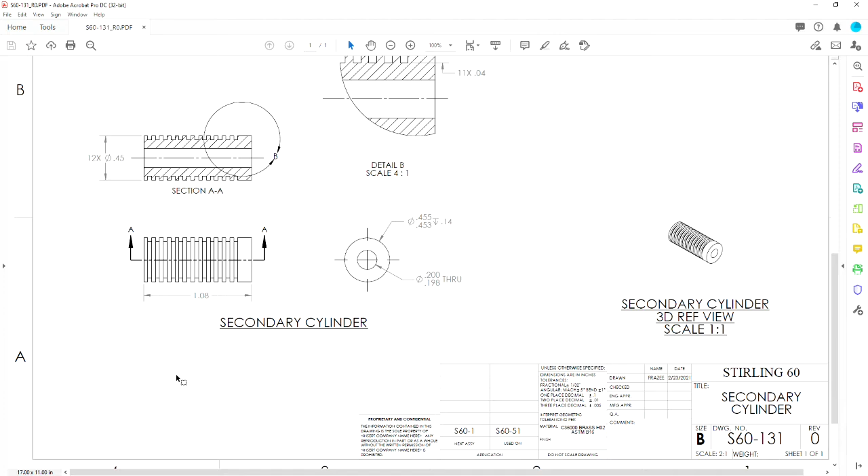All right, so let's look at our drawing, and our front view is what we want to represent in the front view of what we're modeling. We're going to revolve it without the ribs, and we'll include the hole in the center in that revolve. And then we'll come back and make a single groove and use a pattern to duplicate the groove pattern. This is another brass part. So let's go to SolidWorks.

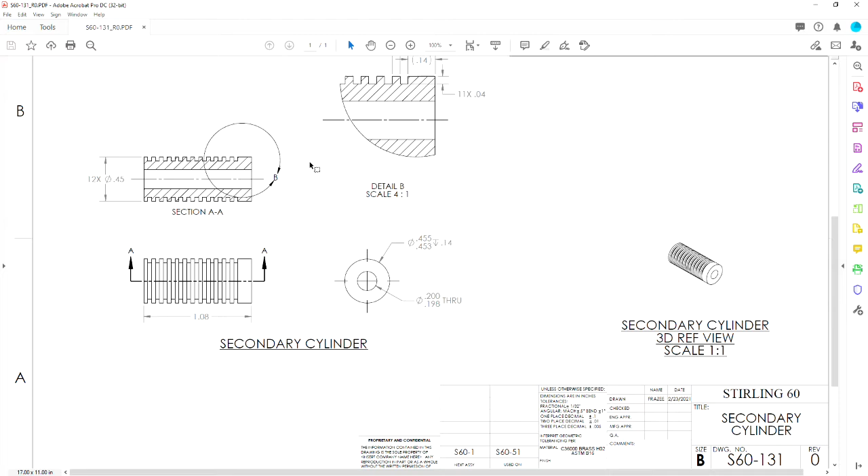And we're going to create a new part. Make sure it's in ANSI and inch. And once that's up, we're going to select part. We're going to hit OK. Alright, so we're going to make our planes visible as we have on several others. And we want the side of the cylinder to be shown in the front plane. And if we look at our drawing, all the dimensions more or less come off this right-hand side. So we're going to put that up against the right side viewing plane. So we'll go sketch. And we're going to sketch on the front plane.

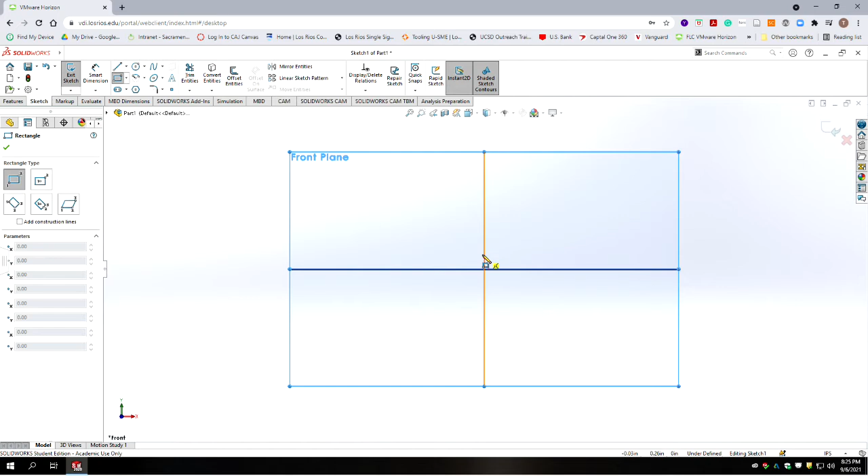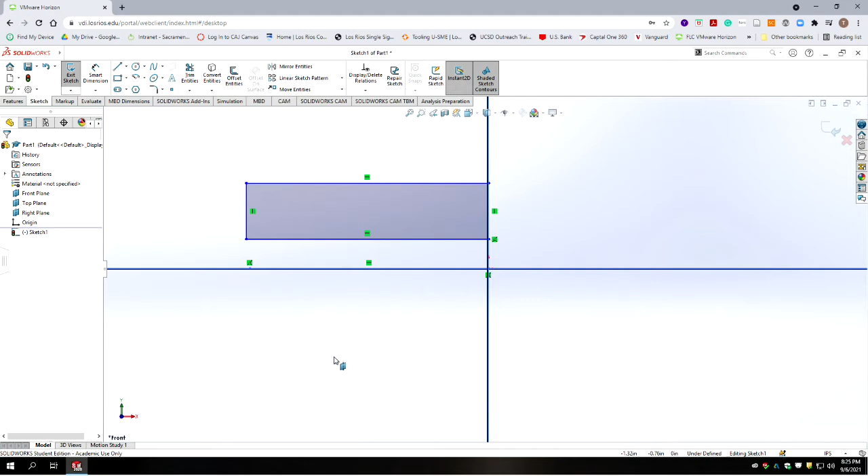And we're basically going to draw a rectangle. And off of that rectangle, off the center, we're going to put in a center line. And we're going to make that coincident to the end of the rectangle we've just made. So our center of rotation will be this center line rotating around this block up here. Alright, so we go back to our drawing, and our overall length is 1 inch 80 thousandths. So we're going to put a dimension on the overall length of 1 inch 80 thousandths.

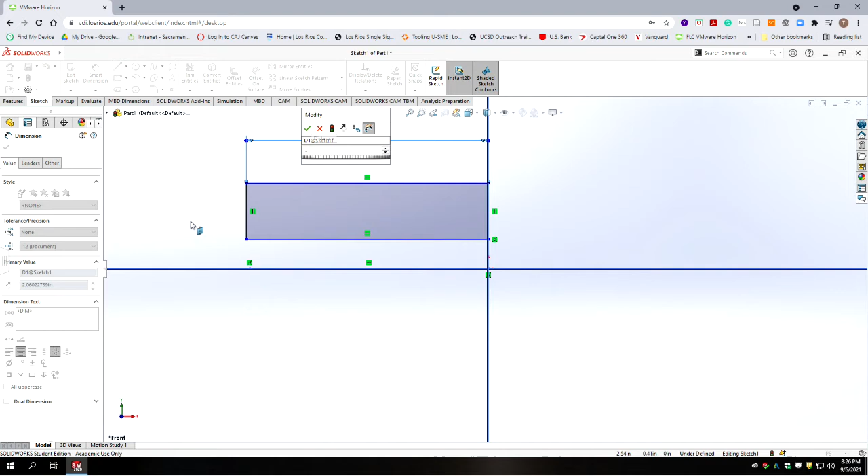Okay, so let's put our dimension from center line to our inside bore. You go from center line to inside bore, and we're going to click out here and go back to our drawing. And our drawing says it's 200 to 198 thousandths. So the mean and the tolerance on that would be 0.199. And we're going to type in 0.199. Okay, and then we have one more diameter, which goes from outside edge to center line. And if we go back to our drawing, that's 455 to 453. So we're going to say 454 is right in the middle of that tolerance. 0.454, 454 thousandths. And we've got the pretty much fully constrained sketch we need to create this revolve.

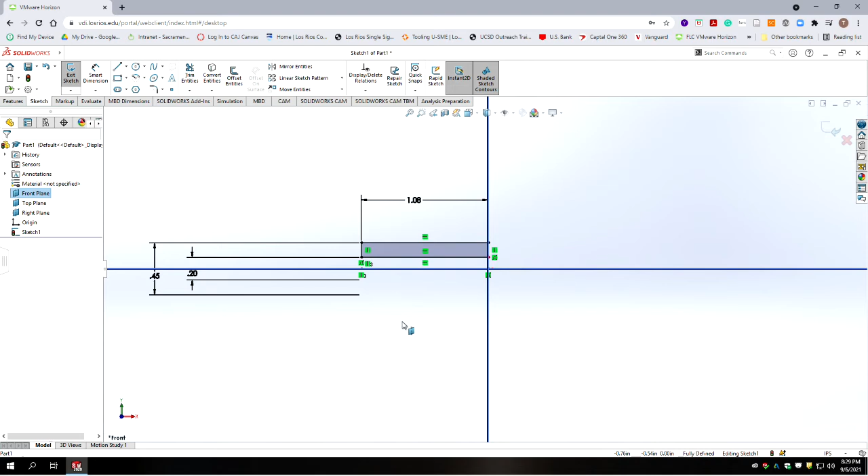Okay, so if we want to be thorough, we can take this endpoint of our center line and make it vertically aligned with our sketch. Okay, we're going to exit sketch. We're going to go to a 3D view. And we're going to create a feature, and that feature is going to be a revolve boss. And we're going to accept that feature, and we've got this bushing looking piece. And we're ready to put in our groove feature.

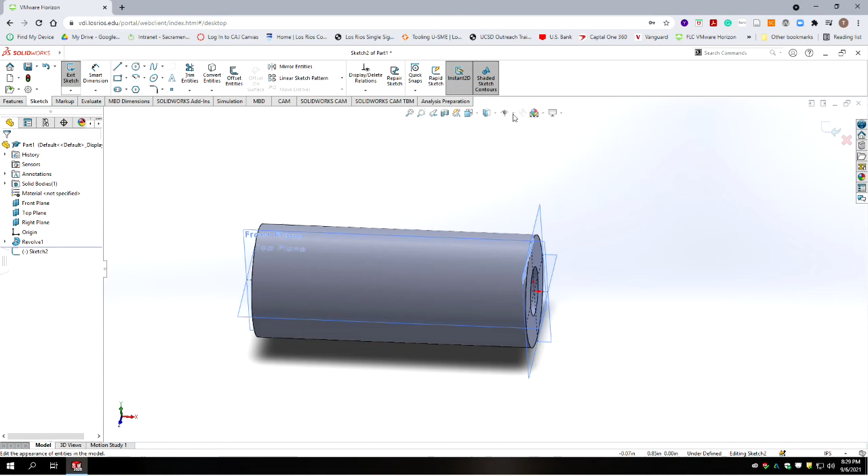Okay, so we're going to make one groove, and that's going to be a revolve cut. So we're going to go to Sketch. We're going to make our sketch on the front viewing plane. And we're going to look at the model from the front viewing plane. And we're going to go back and reference our drawing, and it's 140 thousandths from the edge, and it's 40 thousandths by 40 thousandths. There's actually 12 instances. This is backwards. It should be 11 on the crest and 12 on the groove. So if you have this version of the drawing, the quantity's backwards on this. You need to update that.

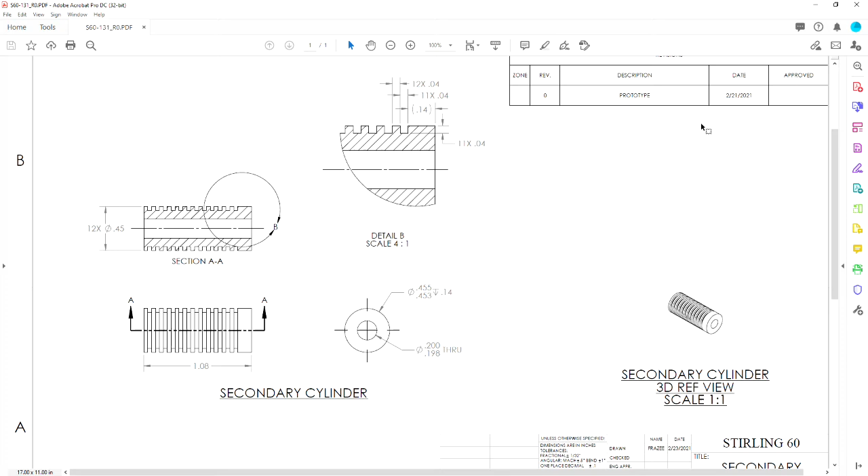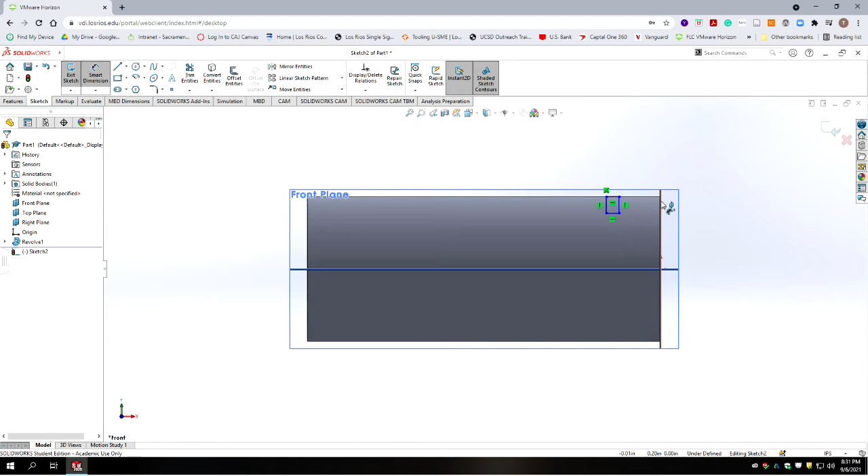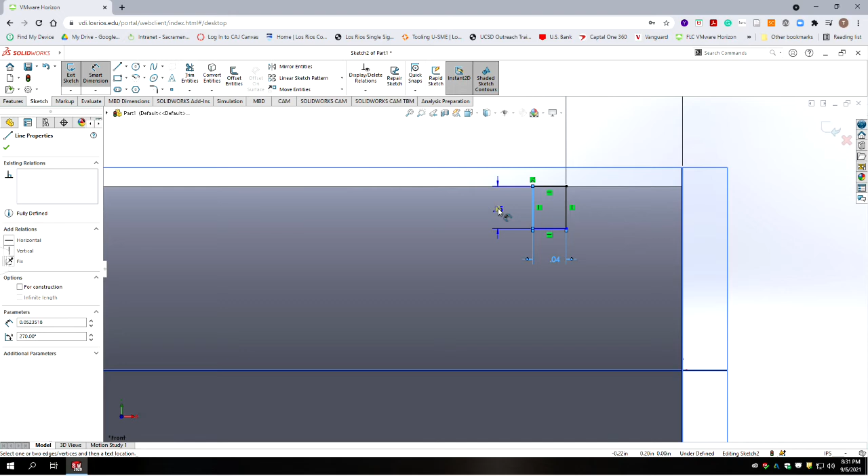Okay, here we go. So we're going to draw this first groove here. We're going to take a rectangle tool and we're going to touch on the silhouette so that it sticks to one line with a coincident relationship. And then we're going to do a dimension from the end of the part to the inside of the groove, and that was 140 thousandths, so 0.14. And then our groove has a width of 0.04 and a depth of 0.04, and that gives us our initial groove profile.

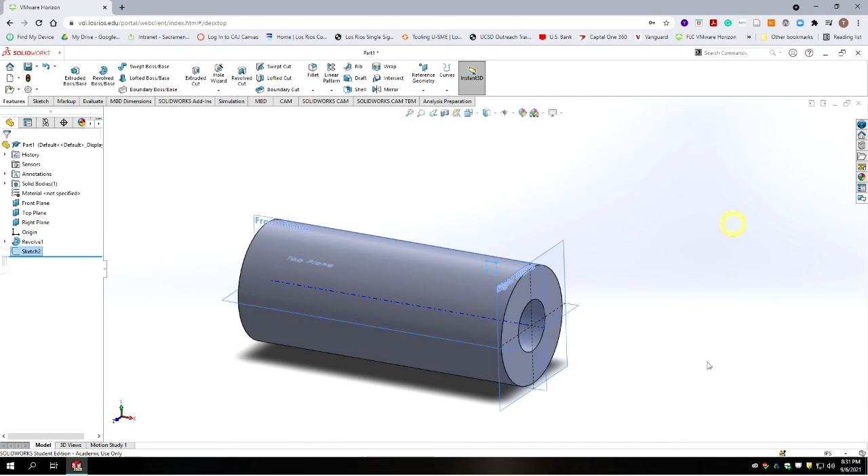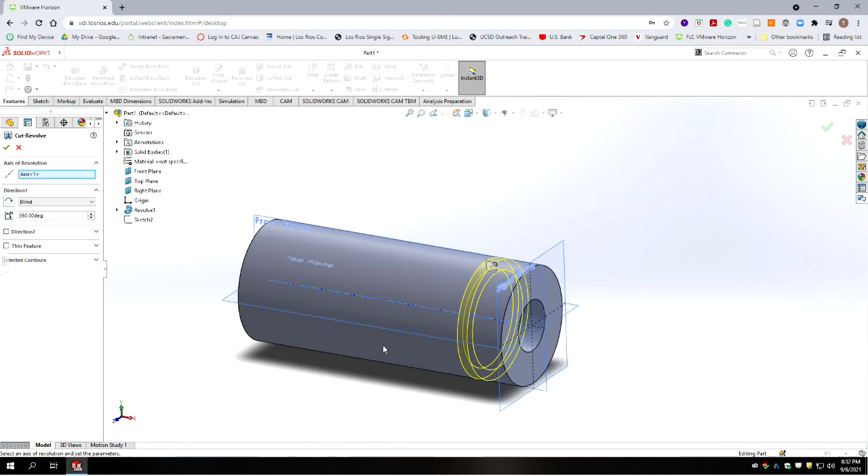Okay, we're going to look at this at a 3D view. We're going to exit the sketch, which should be fully constrained, and we're going to go to features, and instead of drawing a center line, we already have an axis here. It's just hidden. We're going to make temporary axes visible, so that's what this blue line is. And we're going to do a revolved cut using the axis that we just showed and the default sketch that we had highlighted. And so that does our revolve all the way around, and we're going to accept that cut. Okay.

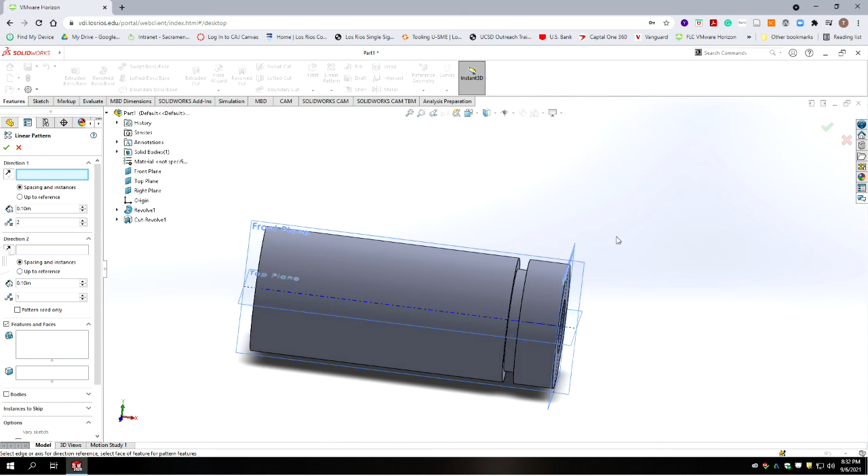Now it's a good time to save, and the next step is we're going to do a pattern. So we're going up to linear pattern, and it asks for a couple directions. Okay, so the first direction is going to be in the direction of the axis, and our groove is 40 thousandths width, and the rib on top is 40 thousandths. So if we add those together, our combined offset should be 80 thousandths. And the feature that we're going to repeat is the groove.

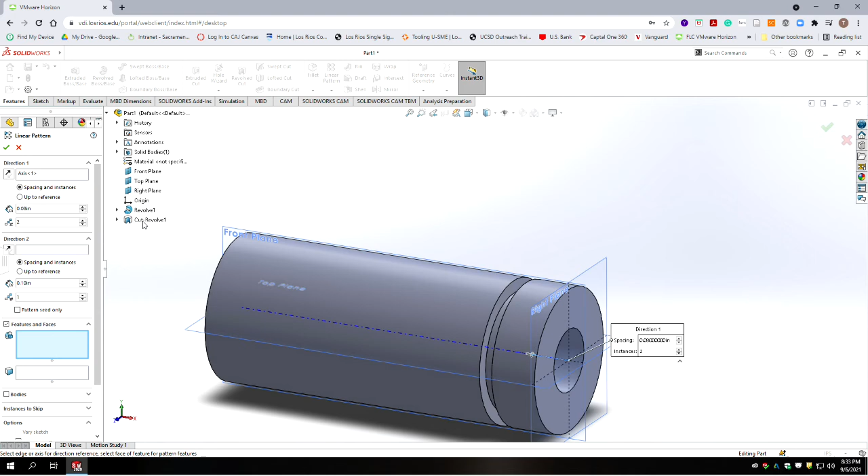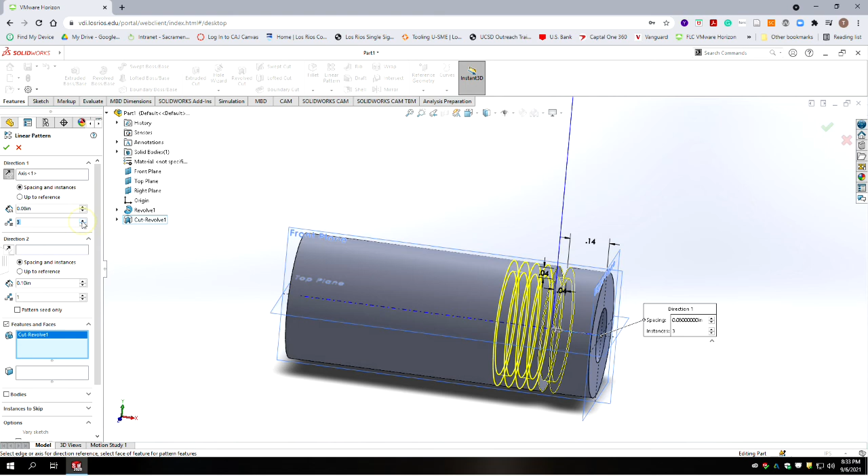Now it looks like we need to reverse the direction. And right now we're only making 2 grooves, and that counts the original. Alright, so we should have 12 instances of this groove. And it leaves a smaller land at the end at nominal of tolerance. The second direction, we're going to select pattern seed only, and it really doesn't matter which axis you pick in this instance, but it's not going to move in the other axis.

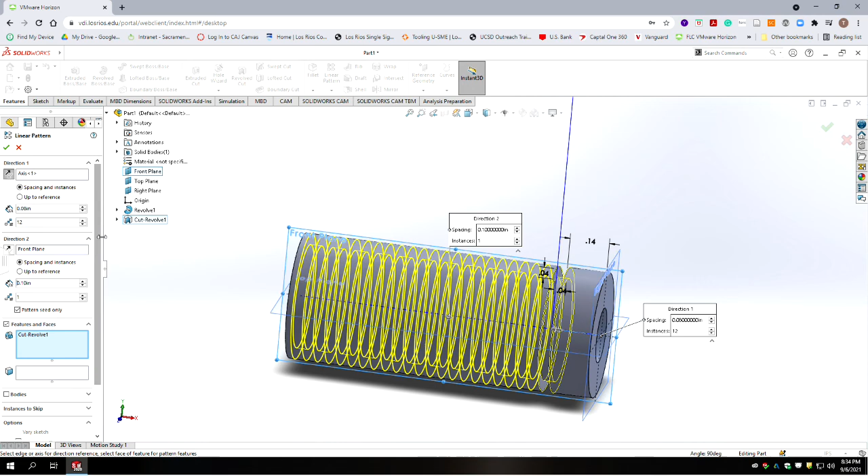Okay, we just finished. Hit accept, and there we go. We have our finished part for the dash 131 part. Now you can change the properties to brass. Of course, this one's brass. I'm going to hide the planes, and I'm going to go ahead and make the temporary axes invisible.

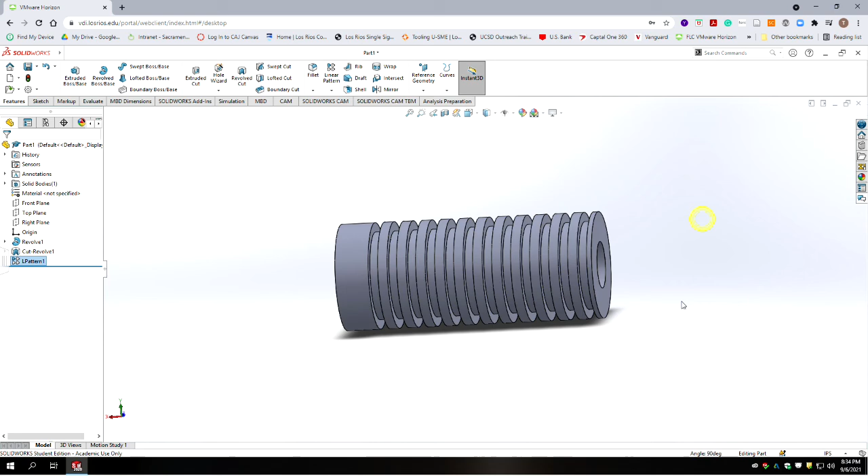But there you go. You've made the dash 131, and I'll catch you on the next one.